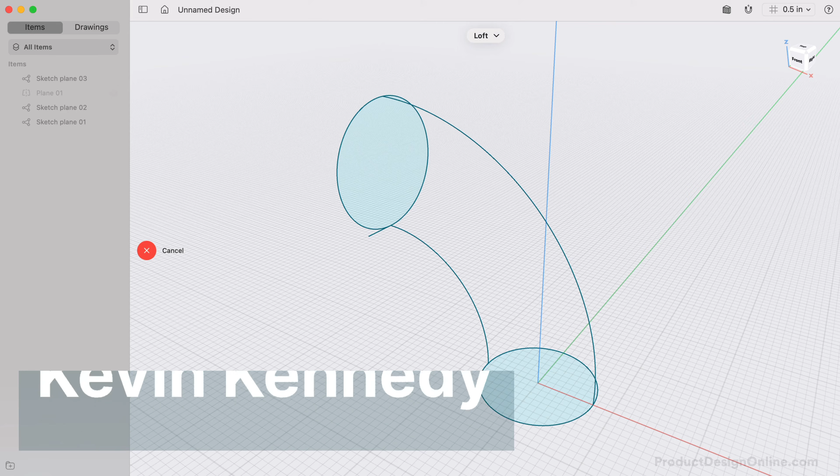I'm Kevin Kennedy, and today we'll design a 3D printable hose adapter for your shop vac or dust collection system. We'll look at the Loft tool along with arcs and construction planes. Let's get started with a new design. I'm also going to change the units to inches.

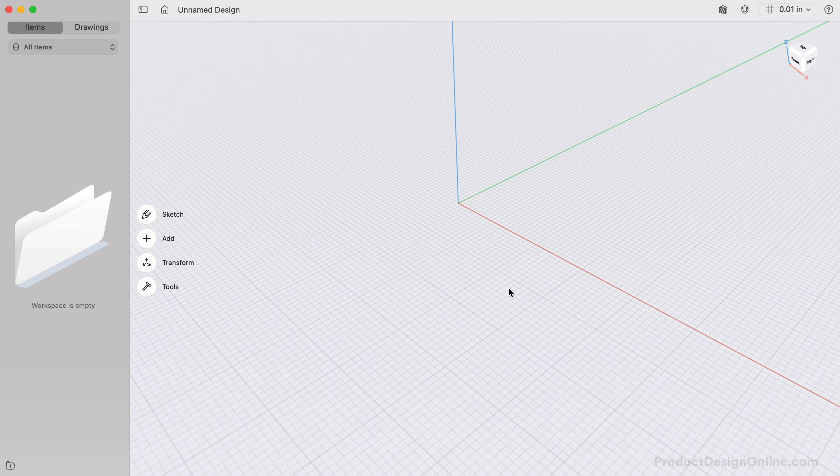We can start by sketching a circle for the first end of the hose adapter. Remember, we can use the spacebar to reorient the view to look directly at the sketch. This also lets us quickly access the sketch tools. Start from the origin point and define the first size of your hose adapter. I'll make mine 3 3/4 inches. Let's also press Escape to clear the circle command, and we'll lock this circle so it remains at the origin.

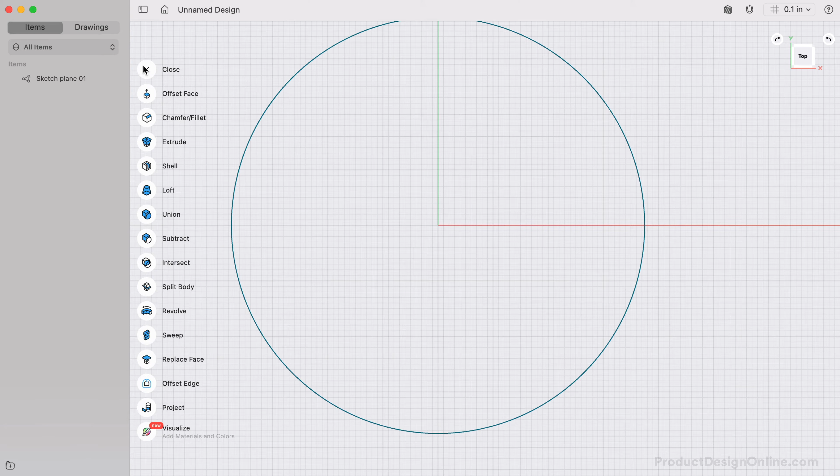To create this hose adapter, we'll use the Loft tool. In simplest terms, Loft allows you to connect 2 or more shapes while creating a solid body. You can also define additional guide rails that help determine the final shape. I'd like to make this a right angle hose adapter so we can proceed by creating a sketch on the front view. It's critical to note that any Loft guide rails must touch all edges of the profiles.

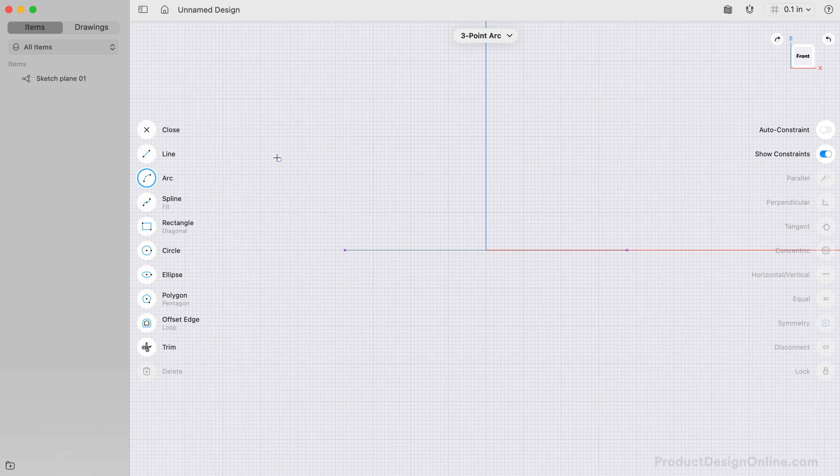With the arc tool active, we can define the first point of the arc by selecting the edge of the circle. Notice the purple points that show where the sketch planes intersect with the other sketches. These will help ensure we're referencing the existing sketch profiles. We can then define the degree of the angle. We'll type out 90 for our 90-degree bend. We can also press the Tab key to switch to the length. Let's define this as 8 inches. We'll also need to select to place the arc in the correct orientation.

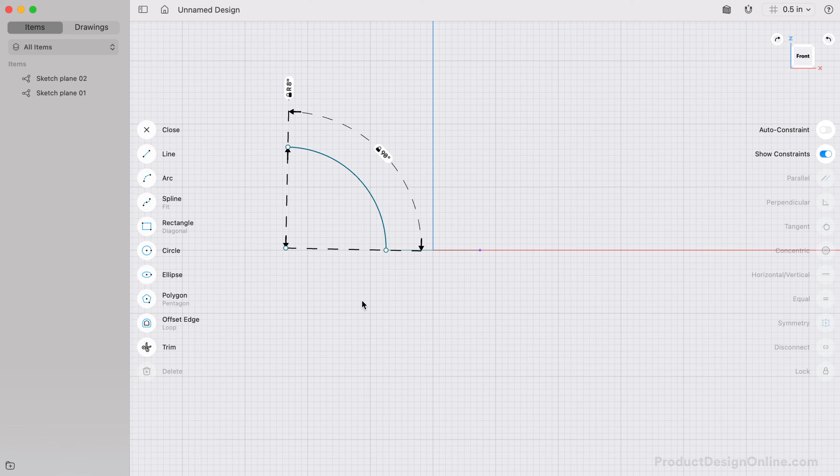When preparing Loft guide rails, it's critical that our guide rails are connected to the sketch profiles and that they don't move. Let's lock this arc with the lock constraint. We now have a single sketch profile and a path to follow. If this pipe were the same size on each end, then we could simply use the sweep command. However, we'd like to define a pipe with a unique size on the opposite end. That means we'll need to create the second circle of the other size on the other end.

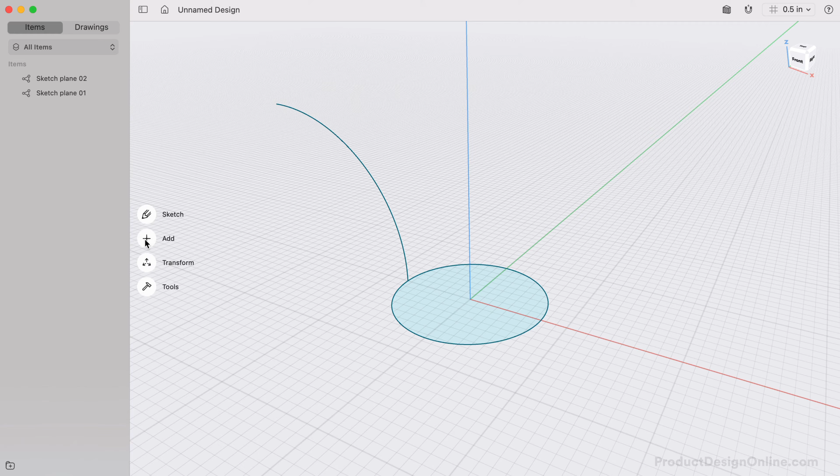In Shapr3D, you can create new sketches on the origin planes, on existing planar faces of 3D bodies, or you can use construction planes. Construction planes come into play when we have no existing 3D bodies to reference. From the Add menu, select the Construction Plane tool. This will give us the option to first define the type. Notice there are 7 different types of construction planes, each of which helps you create one based on referencing different geometry. We only have a single curve to reference, so we'll use the last one called perpendicular to curve at point.

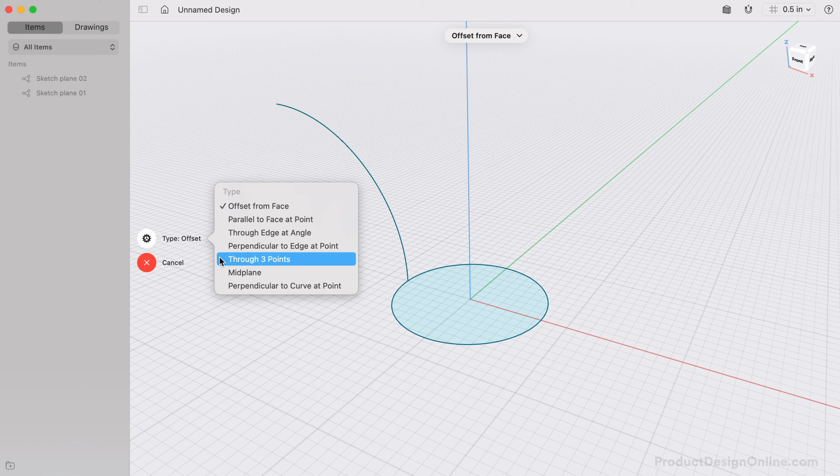Select the arc as the desired curve. Notice the construction plane now appears. This can now be selected and dragged along the curve. We'll want to move it to the end of the curve. After selecting Done, we can now hover over the plane and press the space bar. This allows us to quickly start sketching on it.

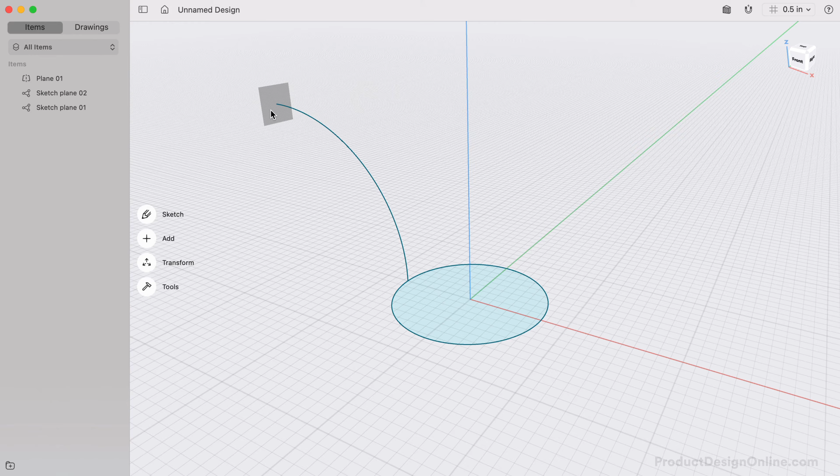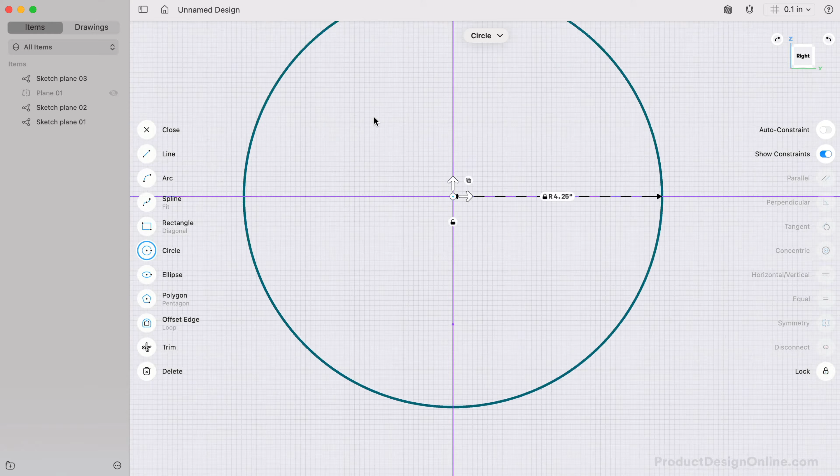Notice the purple point where the arc intersects the plane. We'll want to sketch out the second circle and make sure that the edge touches the arc. With the circle command, let's define a second circle of 4 1/4 inches. To quickly align this circle with the end of the arc, I'll sketch out a horizontal line. Then we can use the tangent constraint to force the circle to remain tangent to the endpoint.

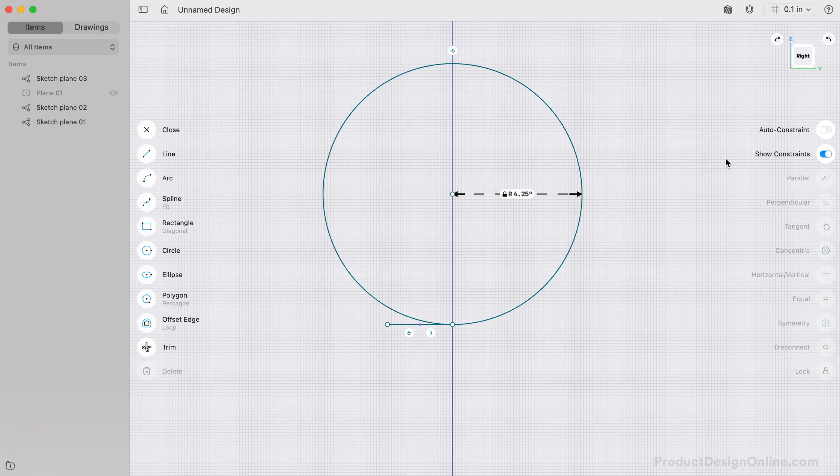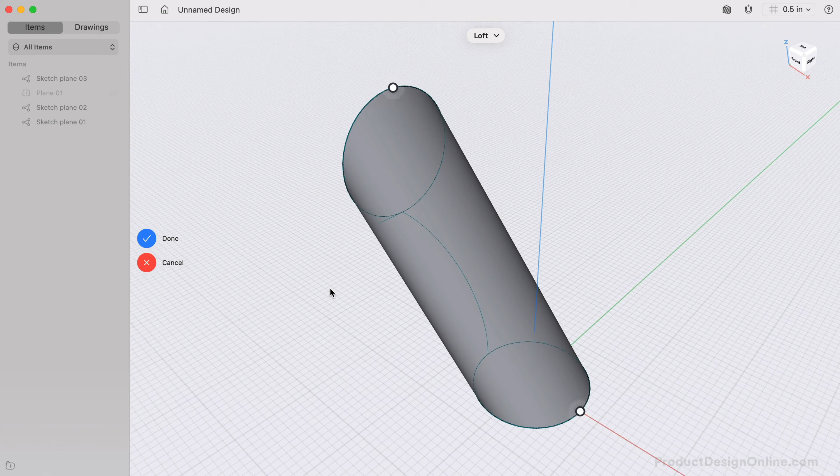Let's now activate Loft from the Tools menu. To create a loft in Shapr3D, select the first sketch profile, followed by additional sketch profiles. In this case, we only have 2 profiles. However, it's important to note that you can use an infinite number of sketch profiles with the Loft tool. Notice the 2 unique circles are now connected. By default, the Loft will create the shortest paths to connect the shapes.

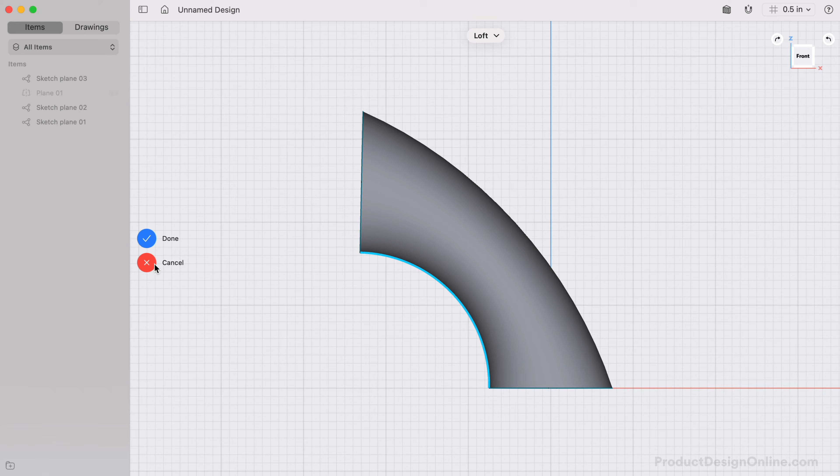You can now select the arc to use as a guide rail. Notice how the shape changes based on the guide rail. However, the top of the shape could use some additional guidance. In many cases, you'll need to define 2 or more guide rails to get the desired shape. We can cancel this loft and we'll create a second arc on the top. Sketching from the front view, this time we can simply snap to the edge of each circle, followed by defining our 90 degrees. Let's also clear out the command and lock this arc so it doesn't move.

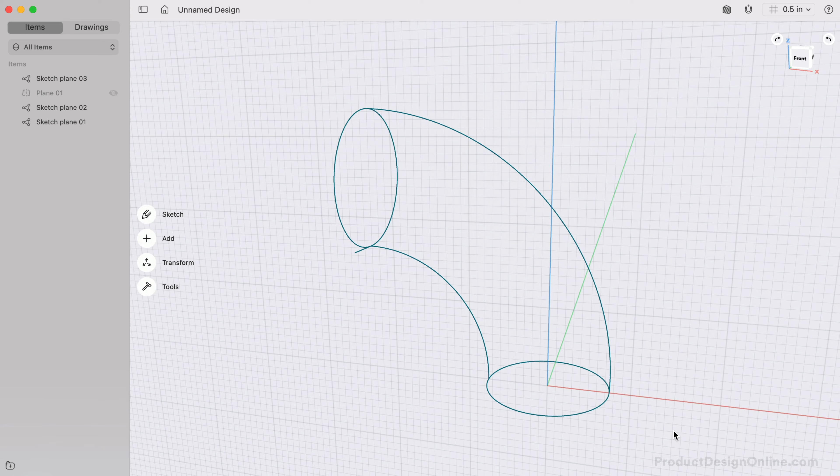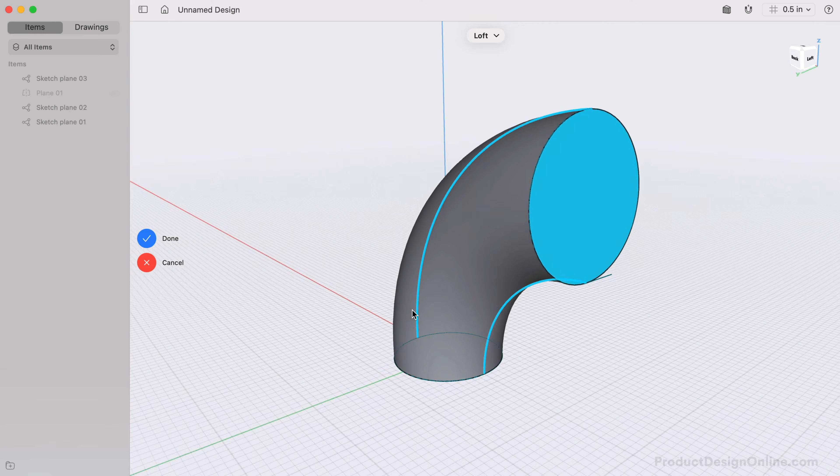With the Loft tool again, we can now select our two sketch profiles, followed by each arc. The order you select the guide rails does not matter. Just remember that they must be connected to each sketch profile, otherwise Shapr3D will not understand how to control the shape and will prevent the rail from being used. This looks great, so let's click Done. We now have a solid 3D body.

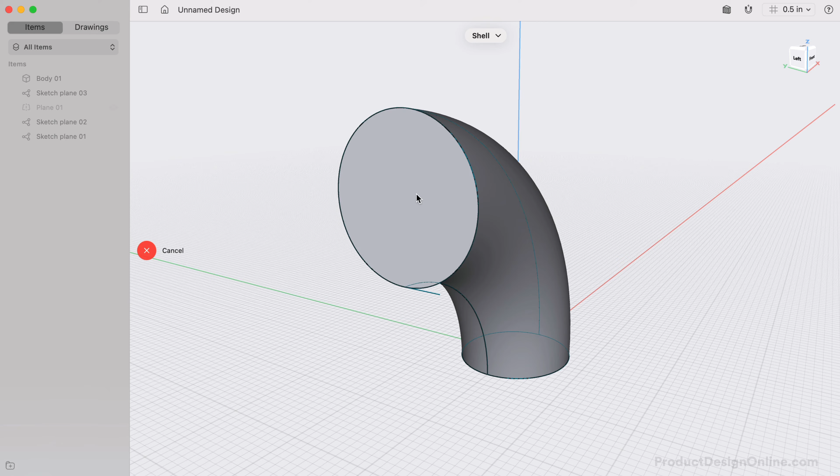To make this usable, let's use the shell command to hollow out the 3D body. If you recall from day number 3, we used the shell command to hollow out existing 3D bodies by selecting the top of the hinged box. Our pipe is a little bit different as we would like both ends to have openings, thus we can select both ends of the pipe before defining the wall thickness. Remember, we can then drag the arrow in to create the thickness inside our shape, or drag the arrow out to define the outside thickness. I'll create an inside thickness of 1/8 inch or 0.125.

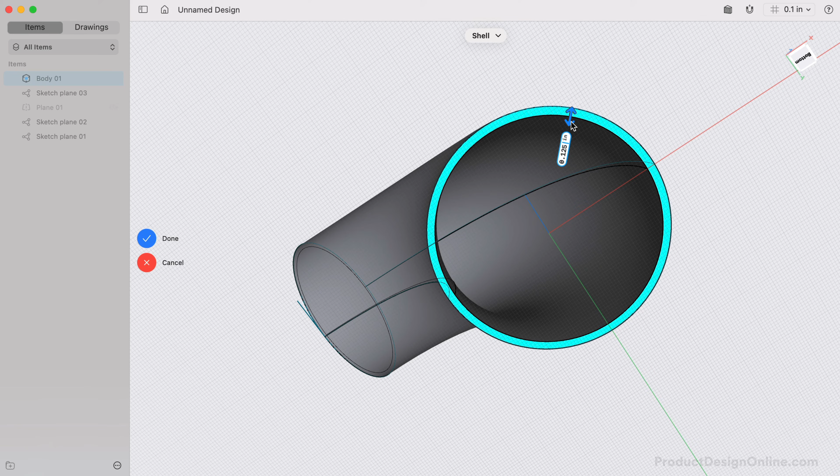To summarize, use the Loft tool to create complex shapes by connecting two or more sketch profiles. Use optional guide rails to further refine the shape of the loft. Last but not least, don't forget to rename your file from the Designs tab.